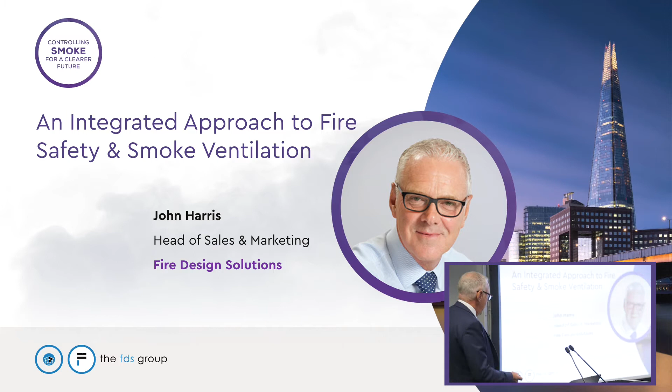No need to worry, I'm not going to ask you to sign any contracts today. Monday will be fine. Okay.

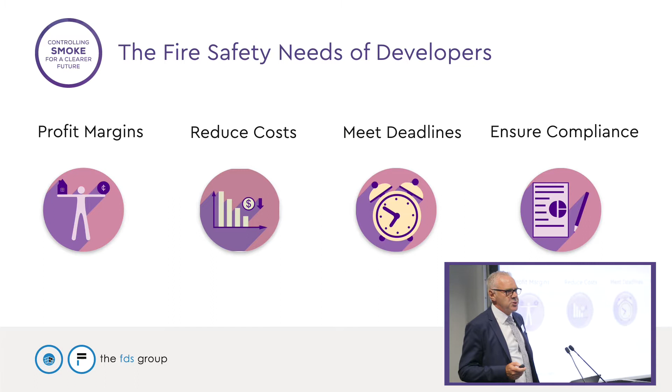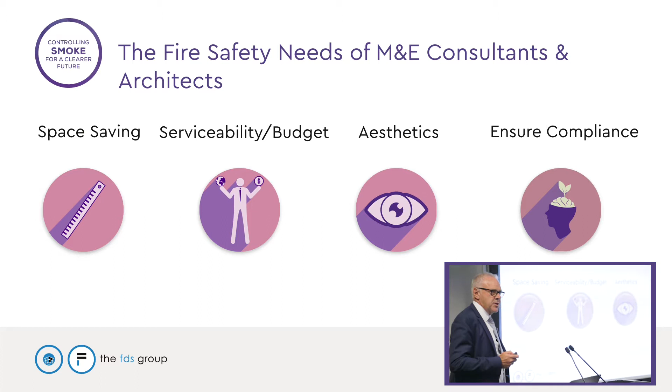We as a group on the contracting side are generally dealing with a group of people that we gain feedback from as to their requirements, what they're looking for from a company such as ourselves, and developers, consultants and architects, and generally what they tell us, they've obviously all got their different requirements. Obviously architects, it'll be the aesthetics, end users typically may be the reliability of the system, but all of this feedback really comes down to a group of things that we look to satisfy with our solutions.

And at the same time we're looking to the future as to where we see the industry going and how we can best tailor those opportunities.

So obviously, as one of the participants in the audience said earlier, I think probably on the buying side it's quite difficult to match the cost-saving aspect with the quality aspect, and sometimes they conflict. But clearly, somehow we have to satisfy those needs and try and provide the optimum solution to the problem, provide quality.

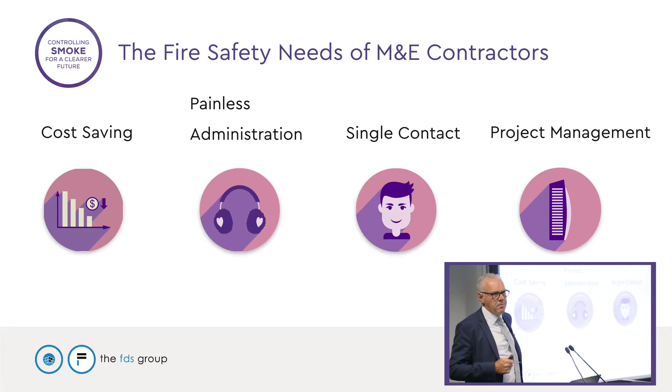I think the ultimate aim for us as a business is to provide quality at the right price with the expertise and backup that we think our clients need.

And of course, don't forget the end user. So all of these buildings that we build or you build and we put smoke ventilation in, we're going to actually put people in to live. And what's important to them, we should be very mindful of that, of course, because ultimately that's what it's all about.

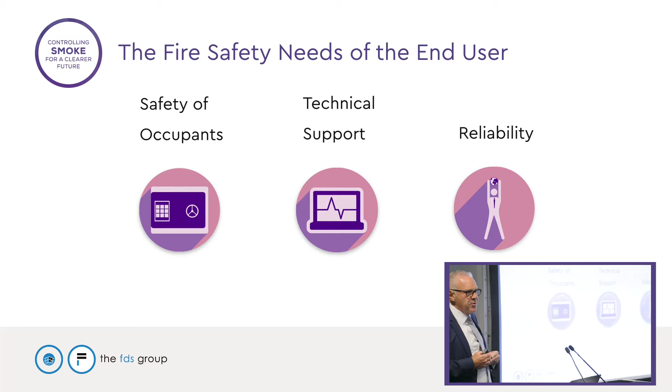The three things that immediately came to my mind were, of course, the safety of the occupants, the technical support for the system, so that we can be sure that it's going to work when it's needed, which is clearly absolutely critical, and indeed the reliability, which I suppose you could say is the same thing, but clearly a life safety system like smoke ventilation is only really used in a genuine emergency situation or when it's maintained. So just bear that in mind as we move through the presentation, because clearly that is absolutely critical.

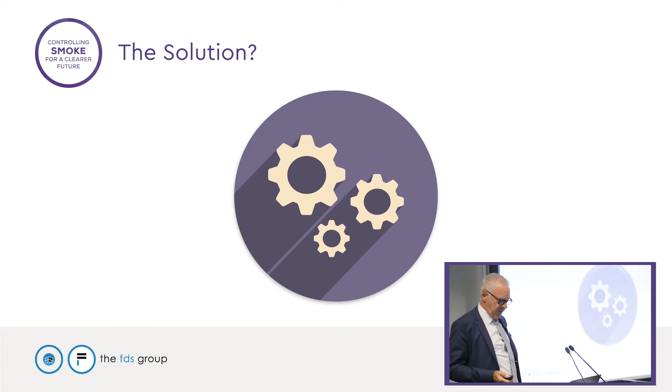Well, as Nick, my MD, reminded me last night, that's not it. Apparently, this is the reason I'm in sales. Apparently if that cog goes one way, the other one's going to go the wrong way, but it was way above my head, so we'll move on from that slide and look at how we see the smoke ventilation business

Moving forward and the best ways that we can offer solutions that meet everybody's needs.

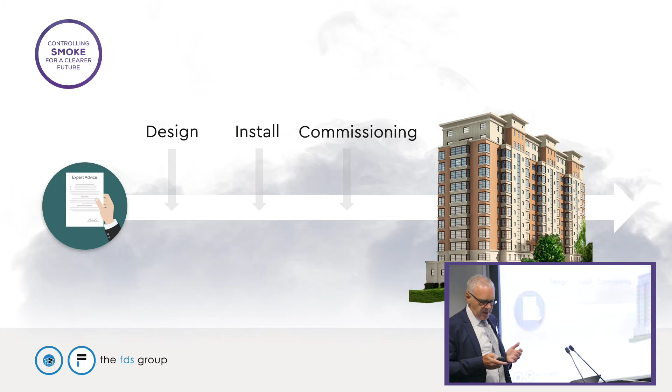Steve obviously spoke earlier about the consultancy side, the importance of the design and what's going on in the industry at the moment and the way we see it moving forward.

I think critically it's important that the expertise of the fire engineer is available through the course of a project from start to finish. We see that as absolutely critical in both delivering a good job, which often needs adaptation through the course of the project.

Generally we find the bigger the project, the more likely it is that there's going to be changes required as we go through. It's not always the size of the building, but often they are quite large projects that we're finding need some re-engineering or modification through the course of installation.

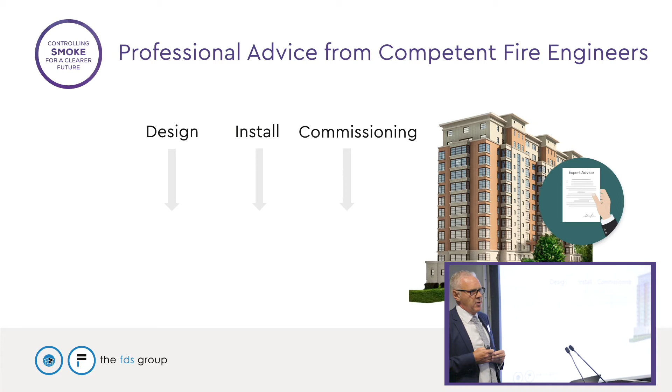And it's absolutely critical to us, certainly in our business, that we do have the benefit of fire engineering behind us.

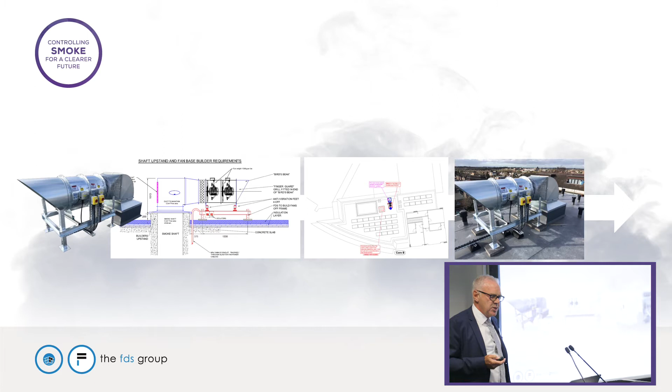That leads on to well-designed, integrated and installed fire safety systems, which I think everybody's been covering this morning. Dependable systems.

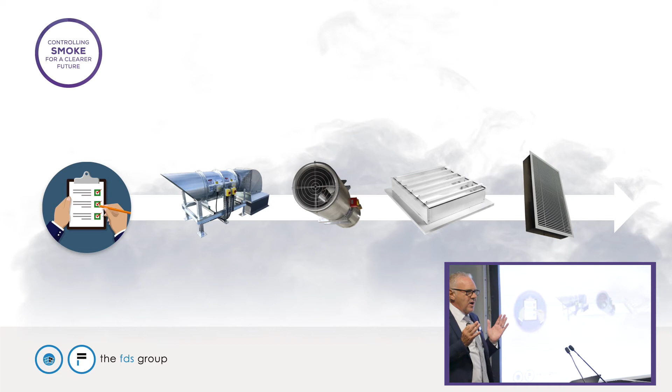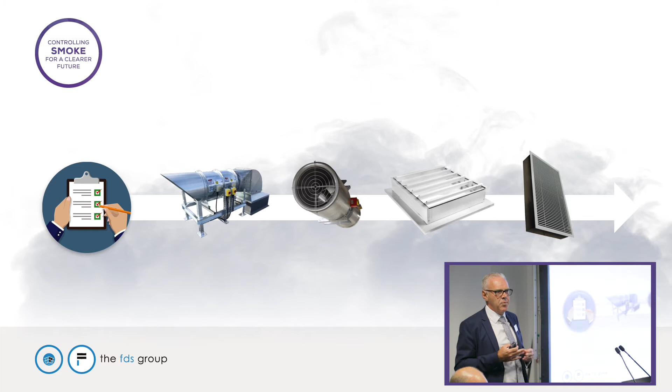So I think the whole point of the presentations today really have been touching on the fact that we have to know these systems are going to work when they're needed. And at the moment we have expressed some, not concern, but we obviously express some areas where we can see there are weaknesses, and those are the areas that we are keen to cover and close, so that we can be sure, or sure as we ever can be, that these systems will work correctly when they're needed.

So I guess from the audience, we've got a mixed audience here. Some people are going to be absolute experts on mechanical and natural smoke ventilation systems, and some are not. So just for everybody, I'll very quickly cover what we see are the benefits and differences of the two.

So there you see we've got a building with, well, this one's actually got a shaft in it and the staircase is over there, but for this example we've also included AOVs over there. And obviously it's the building type that will often determine whether it's a natural or mechanical system.

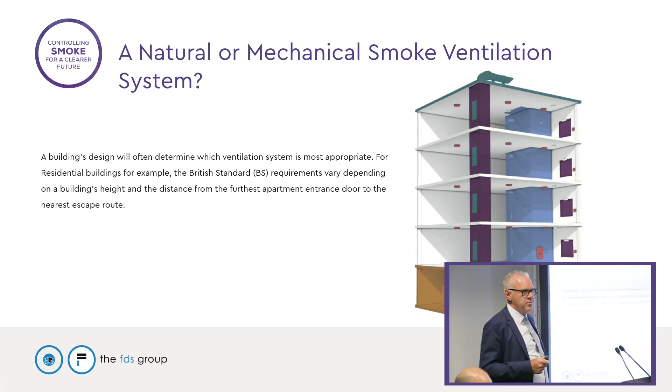Okay, so natural smoke ventilation system, as you can see, there's no fan up the top. There's a shaft. Normally that shaft is going to be a lot bigger than a mechanical shaft. So those involved in floor space, clearly a mechanical system is going to provide more floor space. Although it doesn't seem much, if it's a multi-storey building, it soon adds up. So that's pound notes in terms of either saleable or rentable floor space, whatever you're involved in. And of course, the mechanical system does tend to be more efficient in terms of having a fan drawing the air.

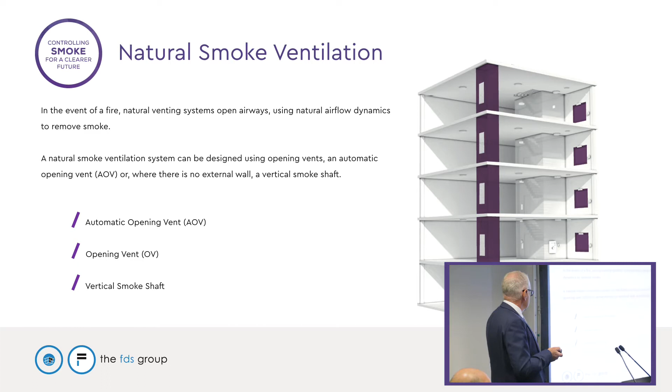In terms of suitability, with a natural system we tend to think they're probably easier to maintain because there's no fans and not so many moving parts. They're certainly cost effective, they are code compliant, and generally speaking, not always the case, we would say they're more suitable for smaller applications, so perhaps something that's a bit lower normally, or something that's not a huge footprint.

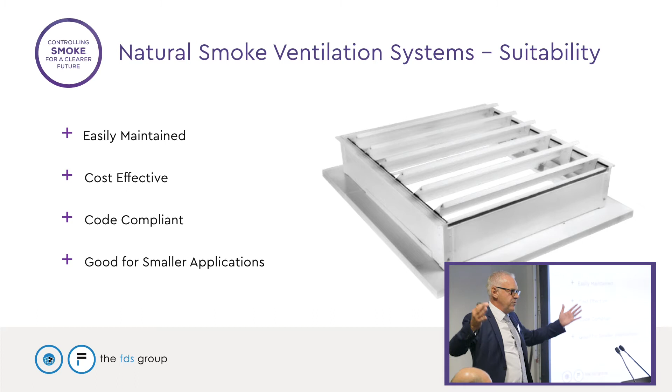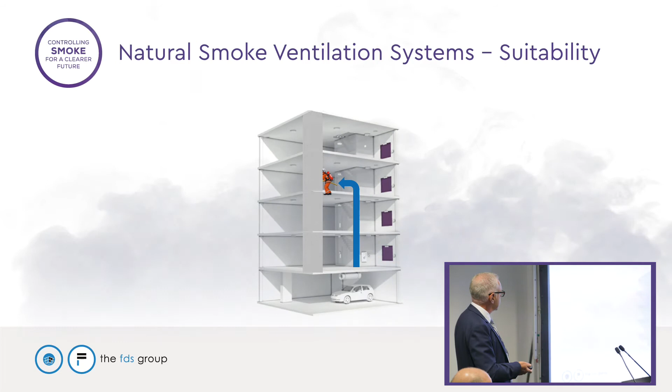This one is actually, so the AOV is opened and the smoke is going out, and that firefighter has got a jetpack, which you wouldn't normally expect, because normally of course they would come up that staircase and prop open that door to get the airflow moving, to get the smoke to go out the AOV. So in simple terms, I think that is the natural system explained.

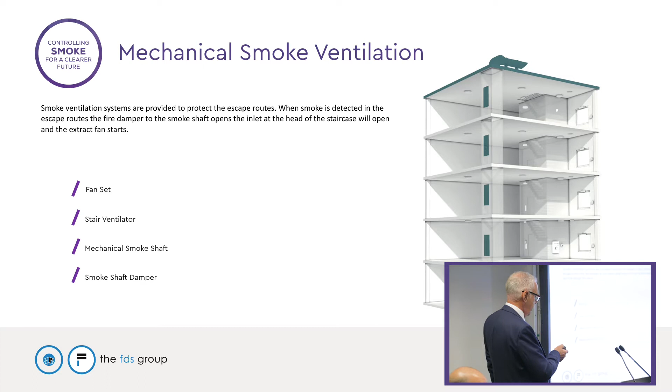And we move on to the mechanical. So a similar building layout. Of course, this one's got the fan up on the top, there's the shaft, and there's the staircase. No AOVs. Of course, dampers in the shaft.

So, mechanical ventilation systems, greater performance as I mentioned earlier, because obviously you've got the fans. Generally not subject to adverse wind conditions, which you may find with natural systems. Of course, you could have problems depending on what's going on out there with the weather. I mentioned about the saleable space, which of course comes about primarily from the smaller shafts.

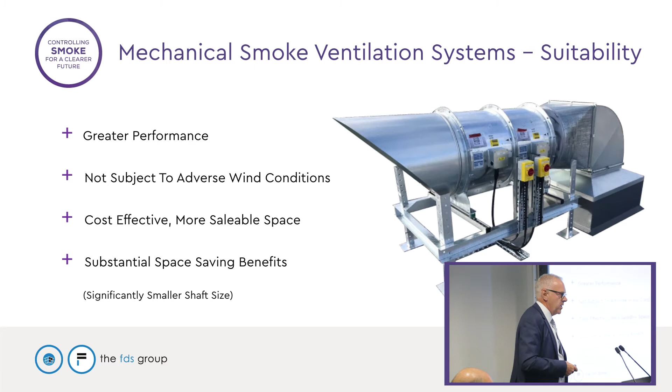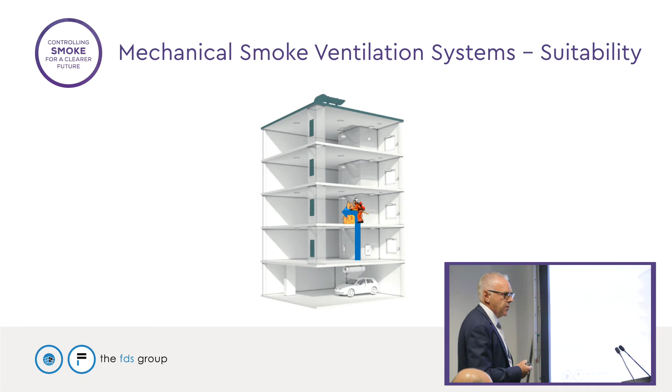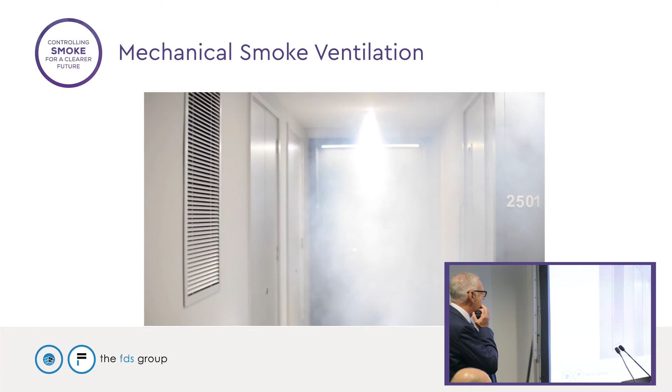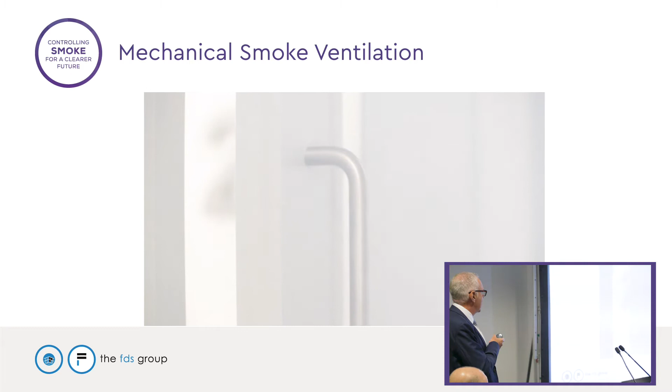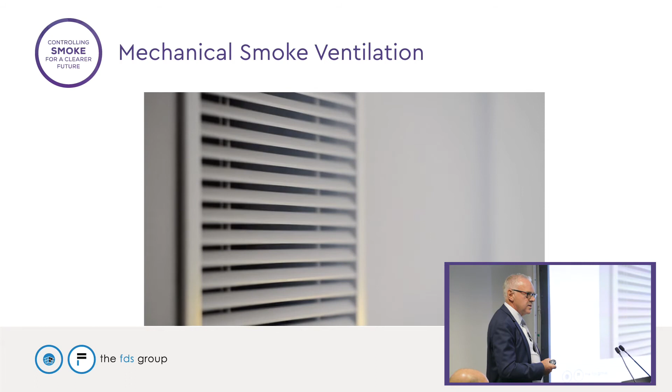And you see the air pulling the door open, of course, so that's feeding the air down the corridor. And you can hear the fans. I thought there was some sound with it.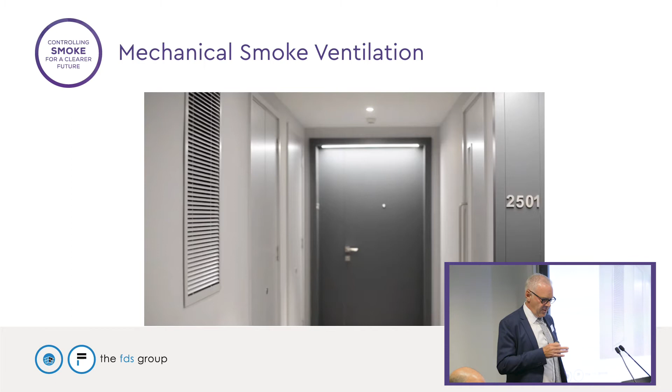That's impressive, I think, and I've seen that video on numerous occasions. Mechanical smoke ventilation systems are very, very effective. That video to me, if ever we're striving to provide good solutions to safety for both firefighters and occupants, provides some reassurance in my view.

Just a quick example of a typical application where we may use mechanical, and where it has been used in fact. This was a project of 6 buildings over in Riverlight, which is somewhere near Wandsworth on the Thames embankment. Different types of buildings, but 6 quite large blocks, and we put mechanical systems in all of those blocks, and indeed the project went very smoothly. So it gives you an example of a mechanical application.

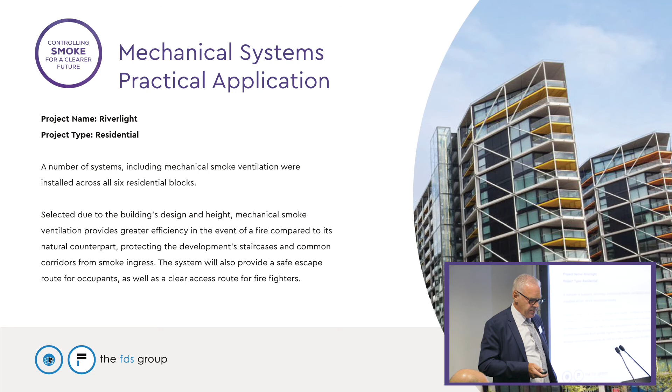So I'll just now jump into CFD. Some people will know CFD, and it was touched on earlier by Alan. It's computational fluid dynamics. Yeah, hopefully, but we all just say CFD. This is the model we use to decide whether the system's going to work or not, basically keeping it fairly simple. It really comes back to the professional backup that we need in any business involved in smoke control.

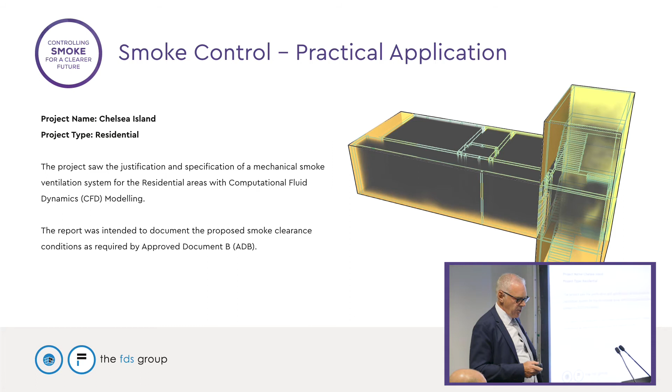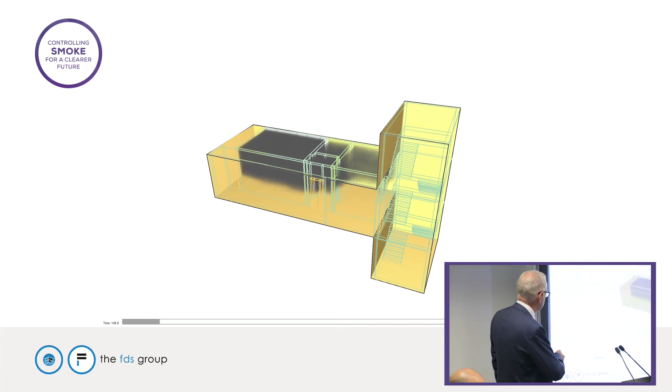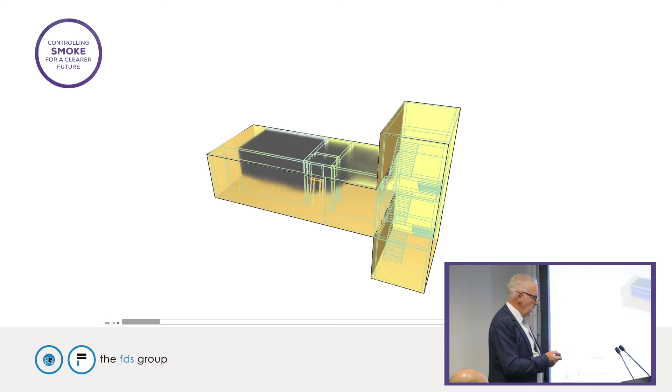This particular project is Chelsea Island, which again was another big residential project. The actual CFD modelling here, in simple terms, that's the staircase, you've got the apartment there, and that's the corridor, and the smoke shaft is there. I believe on this example the corridor is 7.5 metres or less, so I think the firefighting application relates to the staircase on this one, if my information is correct.

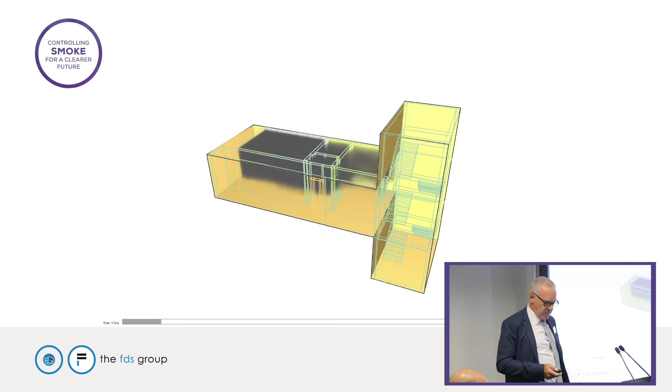So what is all this about? Well, let's have a look, because I think it might do something. Right, what we're modelling here is a fire in the apartment, and the time is being recorded down here.

And you can see there that the smoke is basically being kept out of the staircase at all times. This time clock at the bottom is typically running over 20 minutes, which is, I believe, the standard time we would run for this type of model, on the basis that the fire brigade will be expected to arrive within a quarter of an hour and take 5 minutes to set up and get going in firefighting mode. So we need to keep that clear for them, and also for the occupants of that apartment to escape. But of course everybody else will still be in their apartments.

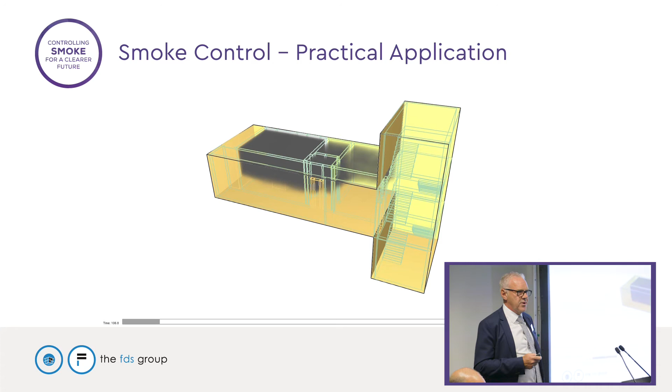So a very simplified version of CFD, but for those of you that weren't sure about it, that's what it is. Clearly the modelling will vary depending on the application and the building. That's why it's so important that if you're involved in smoke control, you engage someone who is fully knowledgeable about this stuff and has the backup to deal with it.

We touched on smoke control certification, so I'm really not going to cover that again, because Alan quite rightly highlighted that they now audit smoke control businesses to ensure they are approved and professional organisations. I know one person this morning asked how we choose people to price jobs, so we know we're going to get a professional solution. Well, I would certainly advise that you look at the list of approved businesses as certified by the SCA, and not look outside of that when gaining tenders, because at least you know you're dealing with people audited by an approved association.

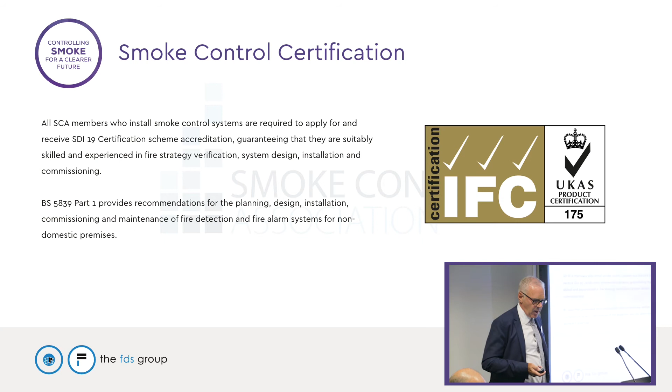Now this is quite a topical subject at the moment, because Steve mentioned earlier that in Scotland, and in Wales I think it was, there's a possibility that residential buildings could go to total evacuation at the fire brigade's choice. That's basically what he was saying. Well, that would make this subject even more important, because you really do need a fire alarm system that conforms to British Standard 5839 Part 1 to provide a full evacuation system. So if we should move in that direction, I would imagine this would almost become compulsory, but that's all speculation.

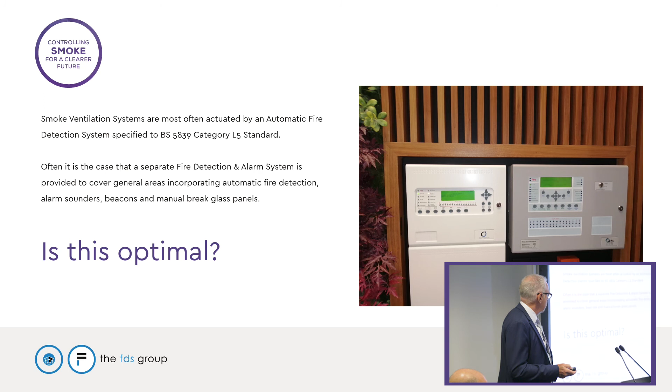So it's all a bit of a strange way of doing things in our opinion at the moment. That's why we are thinking this is not the way forward.

So, an approved fire detection alarm system - it's a critical system, so typically that one panel you just saw would be manufactured to EN54, BS 5839 compliant, so it meets all of the standards of a fire alarm system. And of course, installing one system conforming to all the British standards gives the ease of installation that we spoke about.

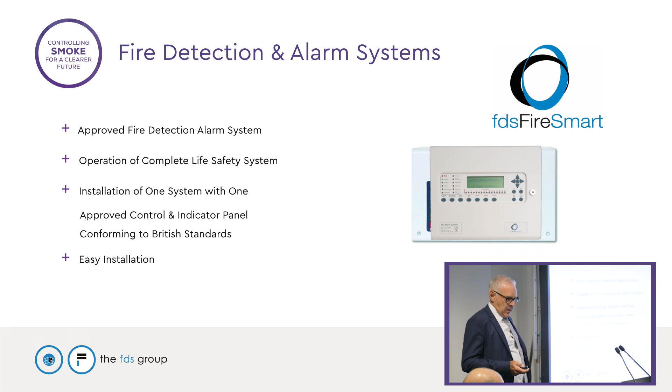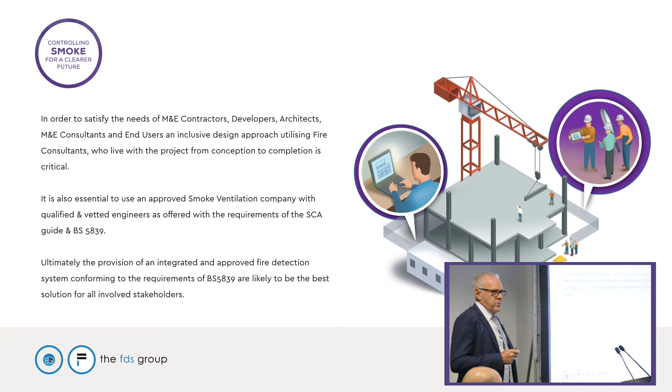The conclusion: at the start, as you remember, we surveyed and asked the interested parties we deal with what's important to them, and it's very much revolves around an inclusive design approach with expert fire consultants who live with the project from conception to completion. We see that as a big thing - people talk about the golden thread and all the other things that have come out of the Grenfell situation, but that very much ties in with all of that.

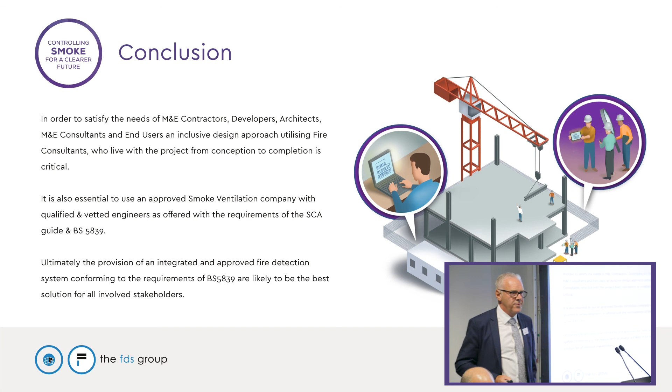I've spoken about the approved smoke ventilation company, and ultimately we think that the provision of an integrated and approved fire detection system conforming to the requirements of British Standard 5839 is going to be critical as well, and that will provide the best solution for all of the stakeholders involved. So thank you for listening.

Are there any questions on my presentation?

Yeah, I mean, in most cases, really, I think - Steve will stop me if I've got this wrong - but in my opinion it's really about the cost and whether it's worth putting a mechanical system into more of a low-rise application. Obviously if you've got something that's 4 to 6 stories, say, and not a massive footprint, the larger shaft's probably not going to make that much difference to you, and it should provide adequate smoke ventilation, but it's not going to be as good as mechanical.